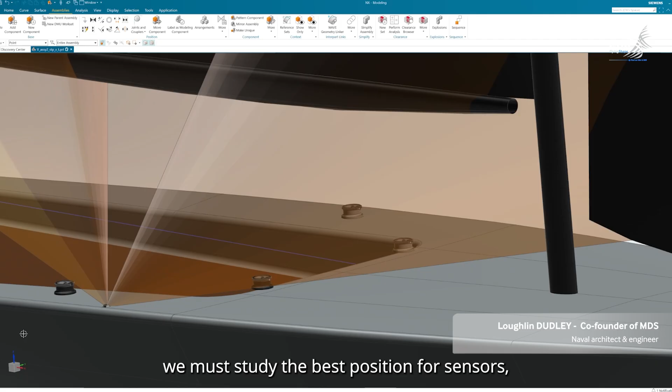To integrate the system on board, we must study the best position for sensors based on the current deck layout. So we study the best position, whether it be for the mainsail or the headsail, and then we provide insight as to where it's best to position the sensors.

The metrics that are produced by Exocet FlyingShape are the classical metrics of sail design, typically draft, camber, twist at various altitudes, entry angle, aft angle, the classical metrics that people in the sailing industry are used to using.

Having all these metrics of the sail when you are sailing helps the trimmer, but also helps to build reference values of how to use the sail in different conditions, upwind, downwind, high wind, medium wind, and will make things easier day after day with references of how you sail the boat best, so you can match the current shape of your sail with all your reference values. So building all this data makes sense to optimize the performance.

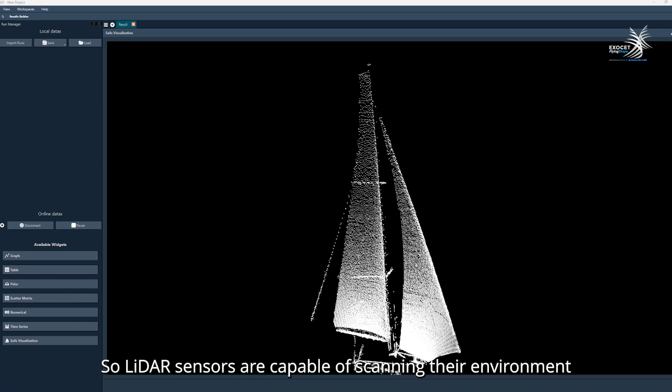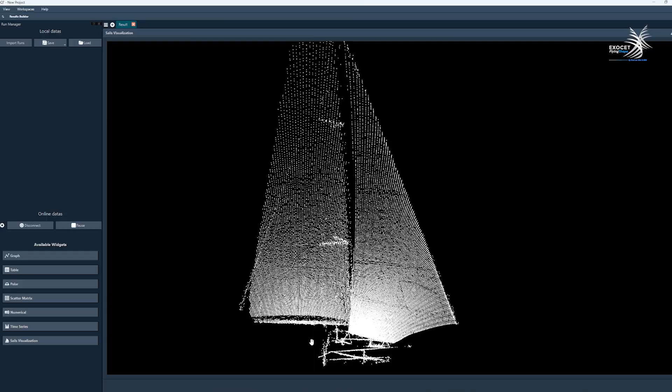So LiDAR sensors are capable of scanning their environment 20 times every second, and so this generates thousands of data points which are then analyzed through the Exocet FlyingShape dedicated computer. By doing this analysis, we can then rebuild shapes for those sails, and so this is yet again done multiple times every second. And those shapes are then analyzed and transformed into meaningful metrics on board the yachts. Twist and camber values are an example of this.

And this data is then sent live into the onboard navigation system, such that sailors, performers, engineers can access this data live and see the consequence of how they are trimming the sails. Once you arrive on shore, you have direct access to the phases which were triggered on water, and in this way you can process the actual shape surfaces of the sails and compare them either in time to one another, but also compare them to theoretical shapes.

So the data collected on board during the sailing session is actually very valuable, whether it be for sailors, for performers, for engineers in the sailing teams, but also for sail designers who can then correlate the logs of data of a day's sailing session to theoretical data that they would expect to obtain on these sails. Once we have the raw point cloud, we rebuild the surface of the sail, rebuild its luff, its leech, and any number of stripes we want on the sail. And then using those rebuilt shapes, we then output twist values, camber values, and so on.

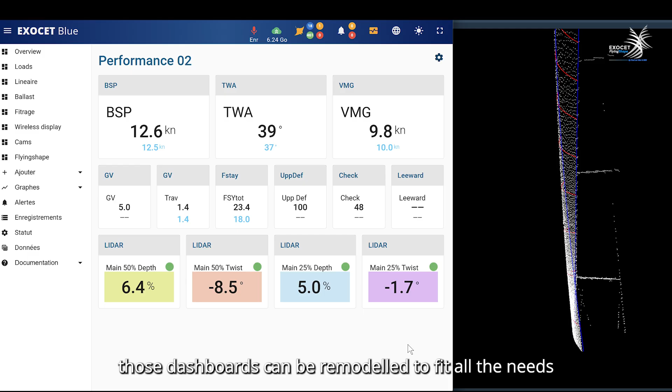The process data from the Exocet FlyingShape then arrives into the navigation unit in the Exocet Blue ecosystem, where you can create any number of dashboards which can then be visualized on computers, tablets, smartphones. On these dashboards, you can display the LiDAR data, twist, camber, draft position, and based on the needs of every user, whether they be sailors, performers or engineers, those dashboards can be remodeled to fit all the needs. So the LiDAR data is then entirely redirected through to the web-based Exocet cloud system, where each user can log in and access his data.

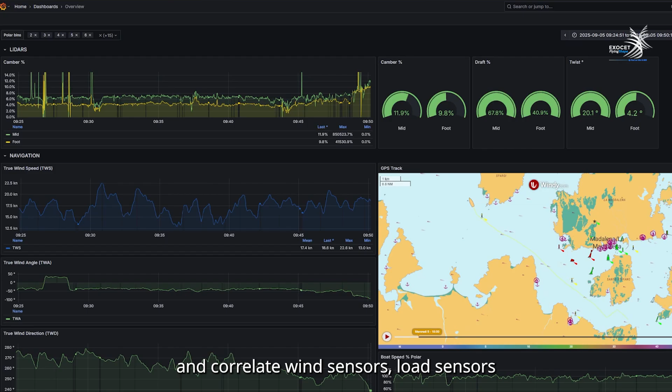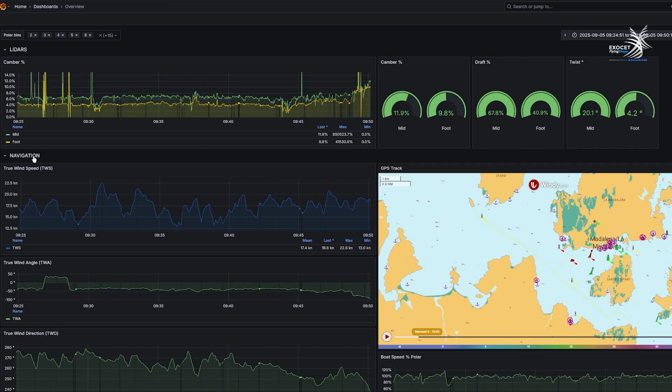So the process data from the Exocet FlyingShape then arrives into the Exocet cloud system and is correlated with all the other data from the other sensors on board. Here, for example, several sections, data from the LiDARs, from the navigation system, and the loads are all visualized together. We can display the sailing day data and correlate wind sensors, load sensors with the LiDAR data, twist, camber, and any other metric we want to visualize on the dashboard. On the dashboards, we can also visualize the load and correlate the load data with the LiDAR data.

Professional sailors are used to using targets to adjust their boat. The heel is a typical one. And now with flying boats, the pitch will be a target. The fly altitude will be a target. And so far we were unable to actually produce and use proper targets for sail shapes because there were no metrics produced for them. There were no measures. Now with Exocet FlyingShape, we can actually produce these metrics, and the sailors can now build their targets and replicate their sail shapes to their targets, also for their sails.

Exocet FlyingShape is really a game changer for the trimmer, for the designer. Having this data live and afterward, when you come back on shore, will help a lot to develop all the engine of your boat. The trimmer, how to use them on board, but the designer, how they develop their tools, the design tool. Does it match what you really have on when you sail? So yes, a real game changer for this kind of people.